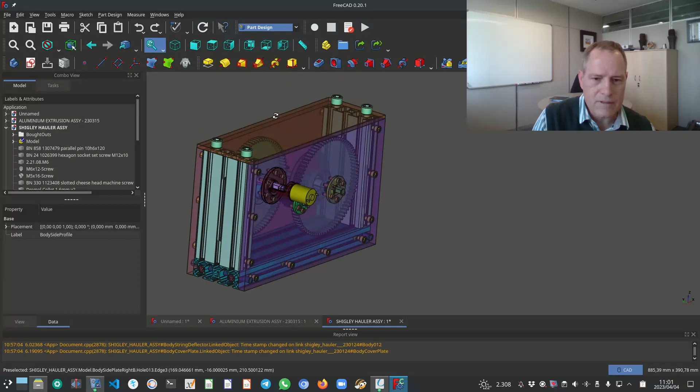So what you see on the screen is a CAD rendering, a CAD model of the Shigley Hauler gearbox. I've got separate videos explaining the gearbox, and what practicum 3 was all about was creating or dimensioning the views of the side profile. I'm hovering over one of the side profiles. There are obviously two of them, one on this side, and if I just rotate it a little bit, there's a side profile on this side, and then the base profile, which is this blue profile here at the bottom. So that was what the practicum was about.

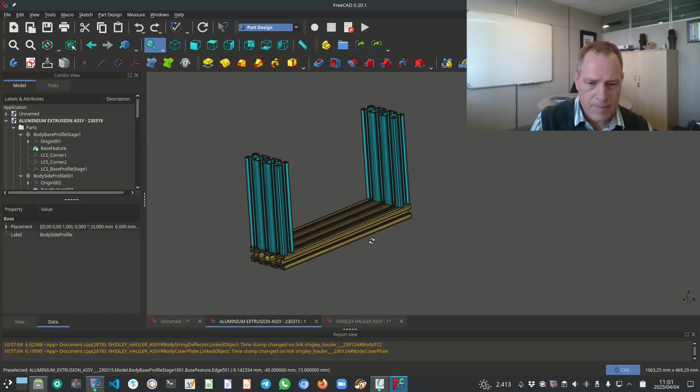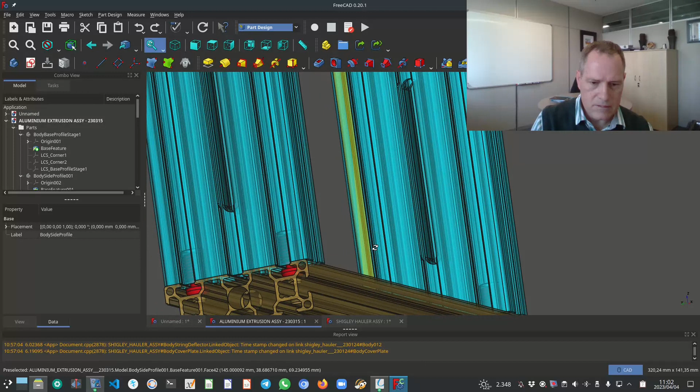In this CAD rendering, I've isolated only the two side profiles and the base profile, and what I did here is I showed how these profiles are actually connected to each other, and it's done with these screw inserts, M12 screw inserts. So for that reason, the side profile is obviously tapped in 4 places, each of them, not only the bottom but also the top, and the reason for the tapped holes in the top is because, if I can go back to this image, here you can see I've got a cover plate on top of this gearbox, and that's also secured with M4 cap screws. So that's the 4 tapped holes.

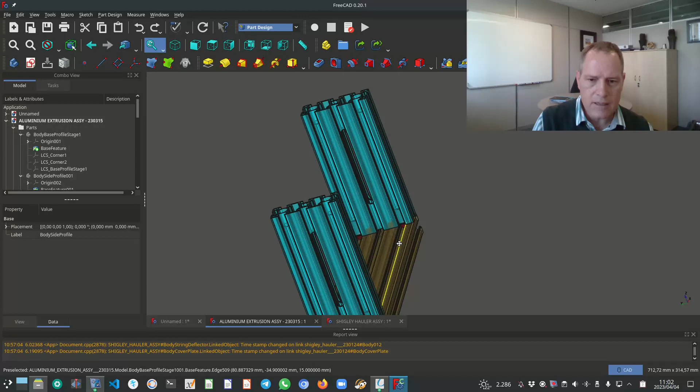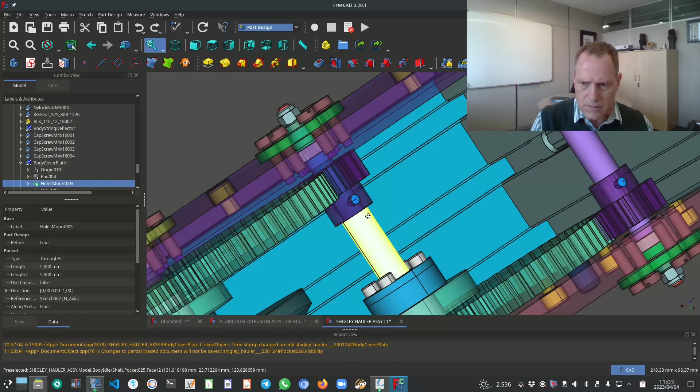Then each of the side profiles also have a slot cut into the side profile. The reason for that is this gearbox will wind a fishing line. Let me just do this quickly. Okay, so if I go to the inside of the gearbox, you will notice it's on this side, yes. So it's a compound gearbox, and in the last shaft there's a hole, so the fishing line will go through this hole, it gets tied down, and then it leads through the slot to the base of the ramp, where a trolley with Shigley textbooks are pulled up the ramp.

Okay, now there's obviously no need to cut a slot in this side profile here, but for ease of manufacturing and assembly, it does not do any harm to cut the slot in both of them. Then you don't have to worry when you assemble your Shigley Hauler gearbox which one goes on what side. There's symmetry in the design, which makes assembly a lot easier.

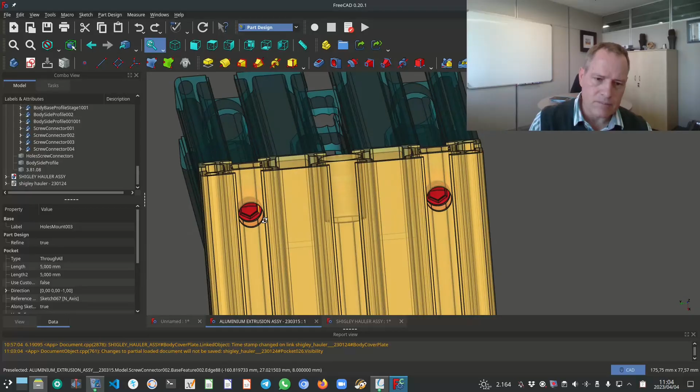Alright, so then in terms of the base profile, in order to secure these screw-in fasteners, these red screw connectors, I think that's what they are called, we need access for an Allen key in order to secure the screw inserts. Okay, so that's, I think, self-explanatory. And then also on the base profile, there are tapped holes here in the middle for a certain depth on both sides.

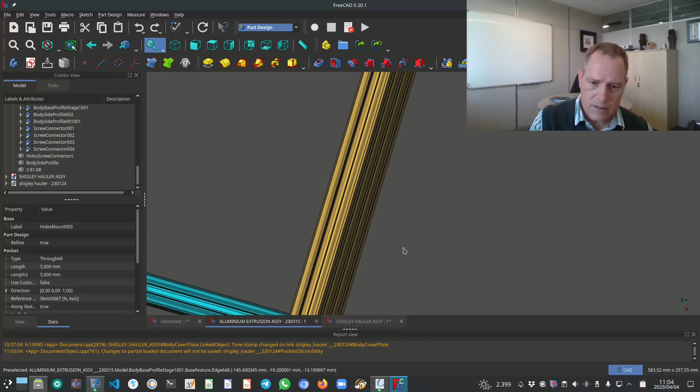Now the reason for those 2 tapped holes, if I can go back here, well, there was a design revision. The older revision of the Shigley Hauler assembly is what you see on the screen. So what I had here was tapped holes in 2 locations, and that's for set screws to secure the dowel pin that runs all the way through, and that's on both sides. The reason for the dowel pins are to get good alignment between the 2 side plates. Right, so I did mention the dowel pins, etc. also in a previous video, so you're welcome to have a look there.

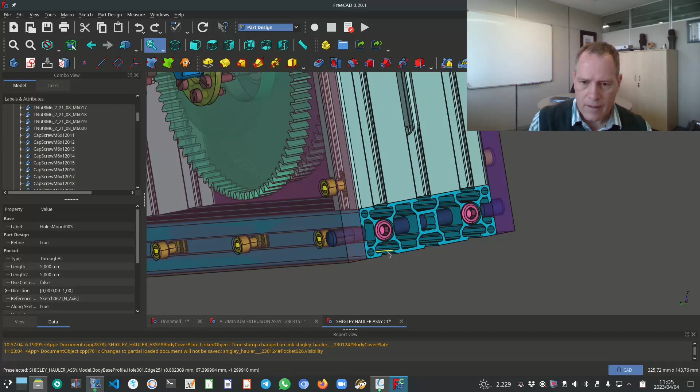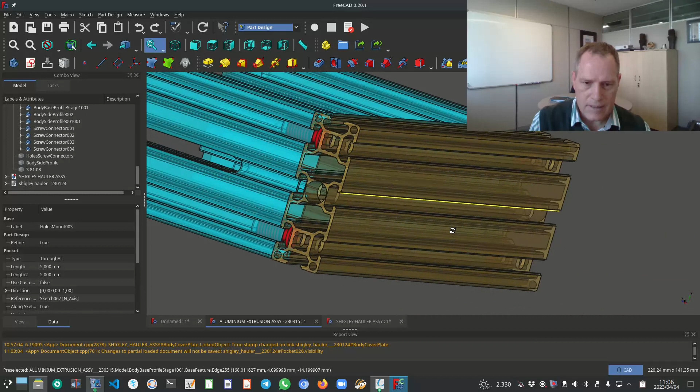So as I said, just getting back to the 2 set screws that I had here in this previous revision, I changed the design to have a single set screw in the middle to secure the dowel pin, and to then successfully have access for the 2 screw connectors. So if I can zoom in here, I've got 2 screw connectors. I need access to those screw connectors, and I need a single tapped hole in the middle to secure the dowel that runs through the base profile.

Now what you will notice, and obviously this will be a question, is where's the hole for the dowel? It's not in this initial or stage 1 base profile step file that you see on the screen.

The base profile is machined in 2 stages. Stage 1 is simply tapping that M12 thread and drilling the 4 holes, and then stage 2 will machine the dowel hole as a precision hole, but we'll get to that in a later video. So that's why what you see on the screen is simply a stage 1 base profile connected to the side profiles.

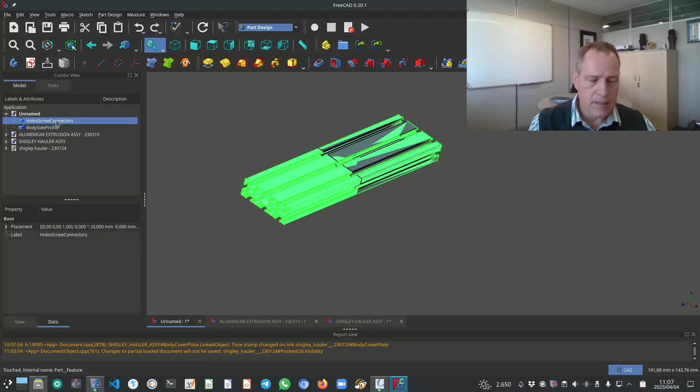All right, so with that said, what you see on the screen here is just an import of the base profile. I also imported the step file of the side profile. So if I click on the base profile and I press spacebar, it will disappear from my window here. And similarly, I can make the side profile disappear by selecting it and pressing spacebar. If I select the base profile again and press spacebar, it will appear again.

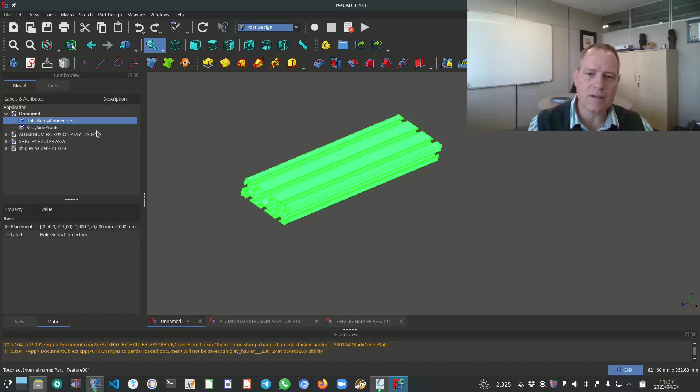And the reason why we have it open in FreeCAD is because we want to take measurements, and for that we're going to use the manipulator workbench. And I'll show later on how we go about deciding which measurements to take, because we obviously first need to decide which dimensions we're going to put on the drawing, and then measure those dimensions on the step file and put it down on the OCR form.

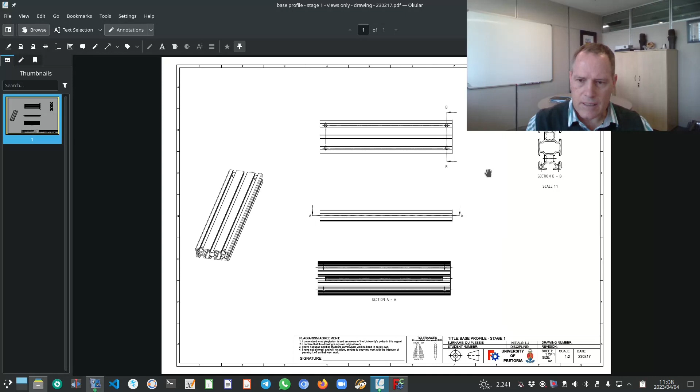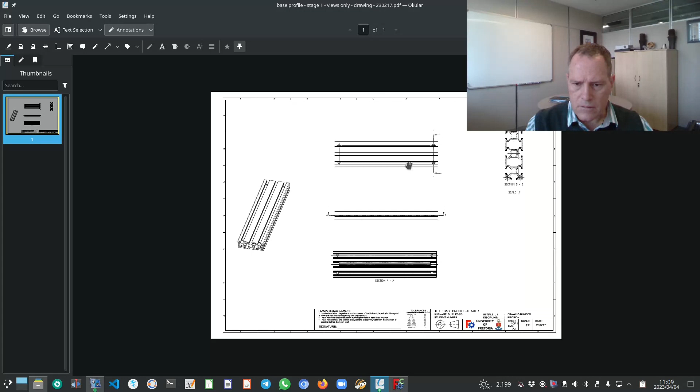Okay, so let me quickly show you. Here we go. What you see here is, if I can just zoom out a little bit. So yeah, that's not going to work. Okay, so these are the views for the base profile stage 1, and we need to now dimension each of these views. I've deliberately taken out the dimensions, just showing the views. So there's basically a front view, a side view, a section view AA, and that's the section view BB.

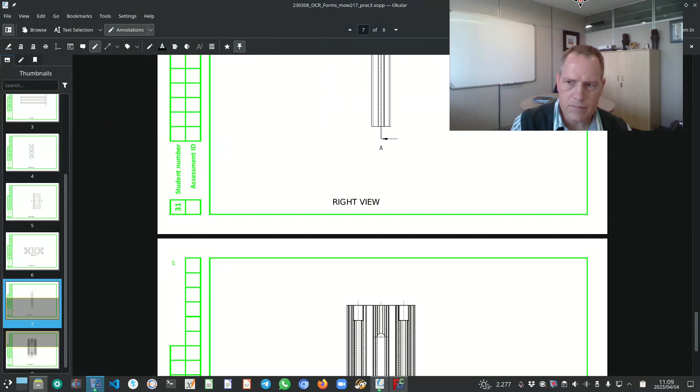So those 4 views we need to dimension for the base profile, and then for the side profile, there's a front view, section view BB, a side view, and a section view AA. So those 4 views for the side profile. Okay, and what the OCR form looks like. So let me do this again. So if we scroll to the top,

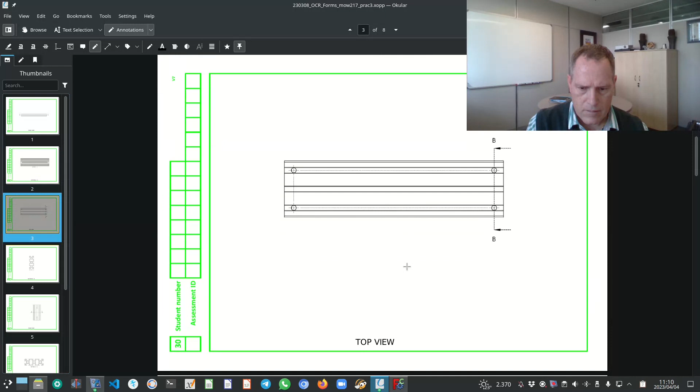yeah, so this is the base profile front view, base profile section AA, base profile top view, base profile section BB, and then side profile front view, side profile section BB, side profile right view, and lastly the side profile section AA. Right, so these are the views that we are now going to dimension.

It's important to note and understand that these profiles come as standard bought out items. You buy them. There are different suppliers in South Africa. You get them from Modular Assembly Technology, and they supply them per meter. You can define the required length you want. So in our drawings, we will not specify any of the detail dimensions. We will, however, specify the length of the cross section and the height of the cross section as reference dimensions. Reference dimensions are put on the drawing for information only, and they're put in round brackets.

But what we will definitely have to specify is the length of the profile we want plus a tolerance. So if we go to our base profile view, we can put the length on any of these views, because the total length of the profile is visible in all three views, but you will put the length only in one of the views. You won't put the length in more than one view because it's unnecessary, and it's also not drawing practice.

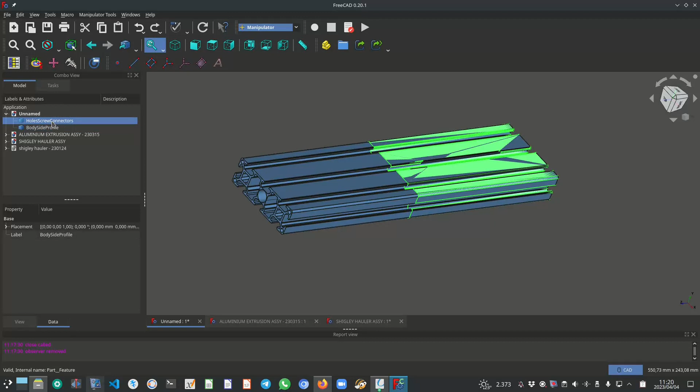In FreeCAD, if you highlight an item in the model tree and you press spacebar, it will disappear. Okay, so I've imported both the side profile, which is now visible on the screen, as well as the base profile, so I can make the side profile disappear. Select it in the model tree, press spacebar, click on the base profile, press the spacebar, and it will appear.

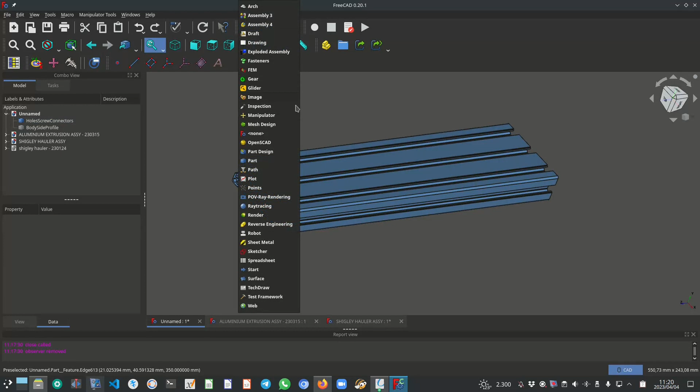Okay. Now, in order to take measurements, I prefer using the Manipulator workbench. There are other ways as well. The Manipulator workbench you need to install specifically from the Add-on Manager. So if you don't have it in FreeCAD, you go to Tools, you go to Add-on Manager. It will open all the available workbenches, and then you can search for Manipulator. There's the Manipulator workbench. Alright, so if you click on it, you can either update, which is I think necessary in my case, but I'm not going to do it now, or install it if you don't have it.

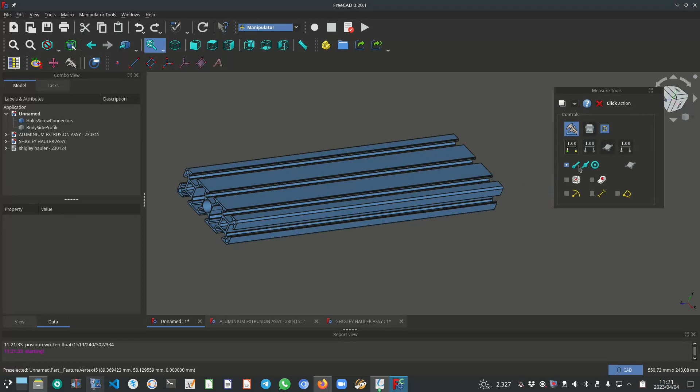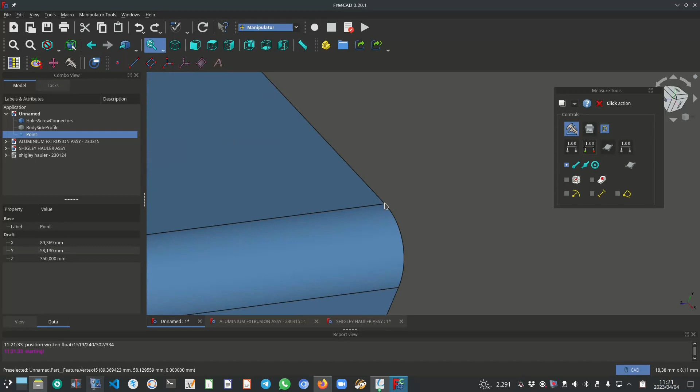Alright. So with the Manipulator workbench open, we click on the caliper, we click on the caliper again, and now we have two options. We can either use the default probe or select endpoints. Okay, so then we need to zoom in enough. Click on that endpoint, zoom out. Now you need to remember which endpoint you selected, but you can do that. Click on that endpoint, zoom out again, and there you can see that the length or the distance is 350 millimeters.

What you will notice is that the distance and distance label are now added to the model tree. So if we want to delete them, select them in the model tree and press delete. Okay, so a more elegant way of getting the length is we click on this icon over here, and then we can select any of the edges. And there you can see the length of that edge is 350, which corresponds to our previous measurement.

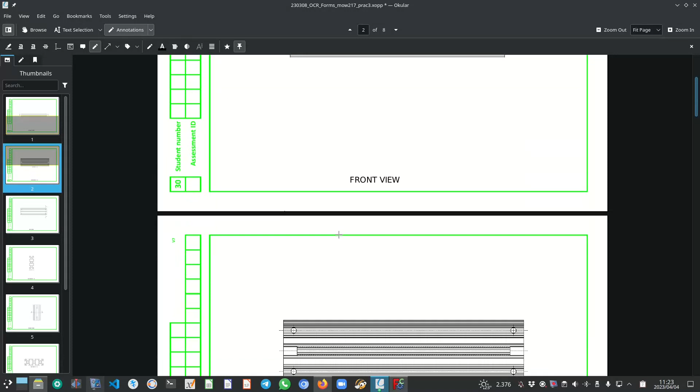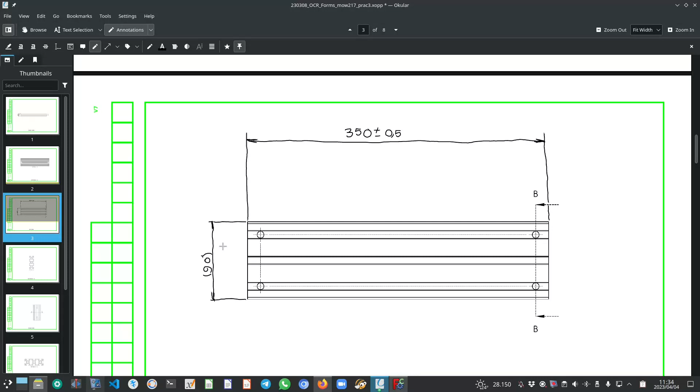All right, so with that done, let's now jump to our OCR form. We're going to add the length on this view as well as the reference dimension, and then on this view we're going to put that reference dimension. Here's the top view. Here you can see I've dimensioned the length as 350, and I've decided on a tolerance of plus minus 0.5. We'll get to the tolerance in a little bit, but you will notice that I've made these leader lines quite long. I want to specify datums and also form tolerances on these leader lines. You will also note the 90 reference dimension, as well as the 30 reference dimension that we spoke about.

Now, I just want to make you aware, if you look at this leader line, whenever there's leader lines crossing any other leader lines, or like in this case the arrow, you will break the leader line. You will not simply draw the leader line all the way through. And even though it is a freehand sketch, please write neatly.

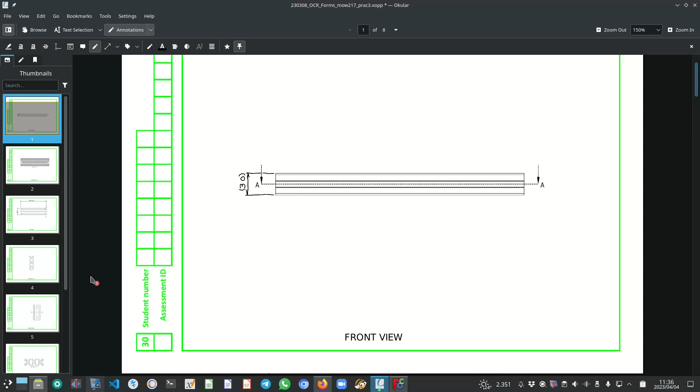The other important thing is the orientation. We will write so that the view is readable in a 12 o'clock orientation or a 9 o'clock orientation, and this is what I'm referring to here as a 9 o'clock orientation. We will not use 3 o'clock or 6 o'clock, 6 o'clock being upside down, 3 o'clock being orientated clockwise 90 degrees. So we orientate our dimensions counterclockwise 90 degrees or horizontal. The same is obviously true over here.

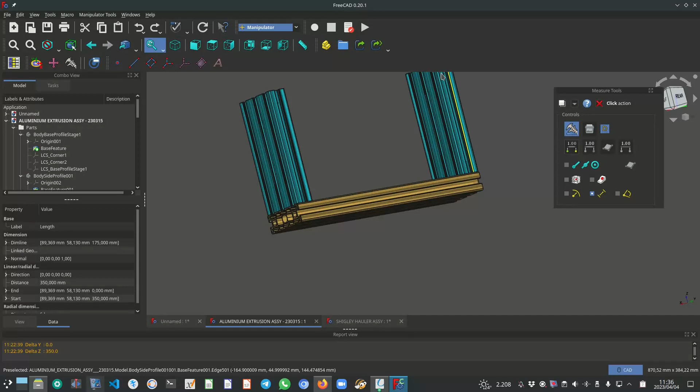Now, let's get to the plus minus 0.5. It's a very loose tolerance, and it's easily achievable with a cut-off machine. For this application, where we have a base profile and two side profiles, there's nothing making contact with this surface afterwards, so we don't have to worry about the length being very precise. Looking at the gearbox as an assembled unit, there's no need to have it very accurate.

You could go for something smaller, but I would not recommend anything smaller than plus minus 0.2, definitely not. Going bigger than 0.5 might also be problematic. Something like plus minus 1 millimeter will be visible in your assembly. So anyway, this is my selection. You are welcome to choose anything else, but not less than 0.2.

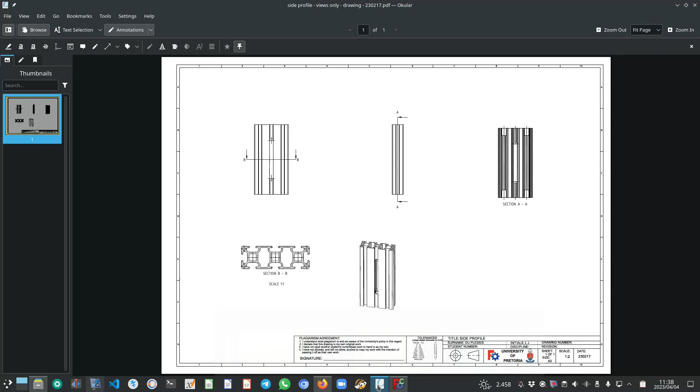Okay, so with the length of the profile specified, we could order cut aluminium profiles to that length, and the manufacturer will be able to deliver what we've ordered. Because we've got a length, he will be able to deliver that. But in this case, we have additional features that need to be drilled and tapped into this profile before it can be delivered.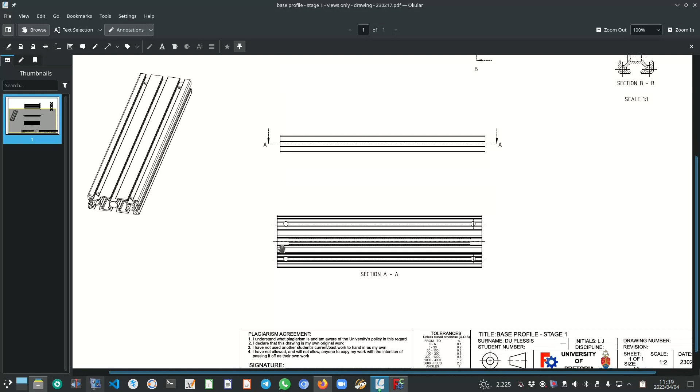So it makes sense then to dimension those features that we want machined or drilled or tapped in the profile. Now the M12 tapped holes that are visible here in section AA, those two tapped holes, let's dimension them, and then finally we'll dimension the 4 access holes, but that we'll do later on. Okay, for now we are just going to dimension the tapped holes.

If we go back to the supplier website, here you can see that the diameter of this profile's center hole, actually all 3 holes, that diameter is 10 and it is suitable to be tapped M12. That's why the supplier put this M12 here in brackets. It's suitable to be tapped. Okay, so all we need to do really in order to specify the tapped hole is the depth of the tapped hole. And there's only one obvious choice to dimension that depth, and this is on this section AA view. That's where we will dimension the depth.

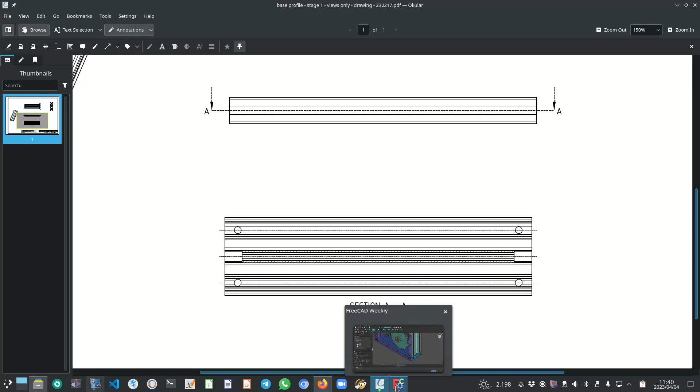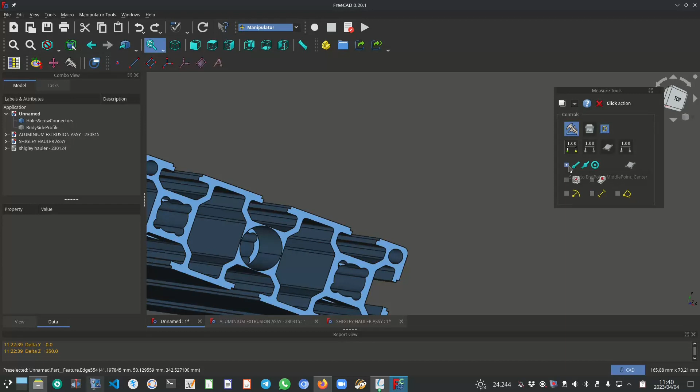Alright, so now what we will have to do is measure that depth. Okay, so let's just delete these measurements that we took. If I zoom in, I can rotate. So what I can do with the manipulator workbench, let's select the probe. Let's select this circle then. And we zoom in and we select that circle. Okay, and here you can see the length between the center points of those 2 circles is 20 millimeters. So that's the depth of the hole.

Now what we'll do is we'll go to our drawing. Where was it? I think it was here. Yeah. So on this view, we will simply dimension and show that this is an M12 tapped hole, and we'll show the depth with a tolerance. All right. So what I've done here now is I've indicated the depth. Well, firstly, let's just talk about specifying the thread. So I write the words tap M12 by 1,75. That 1,75 is the pitch of a coarse M12 thread, and I put the words in 2 places, because it will be unnecessary to dimension this tapped hole on both ends of this section AA.

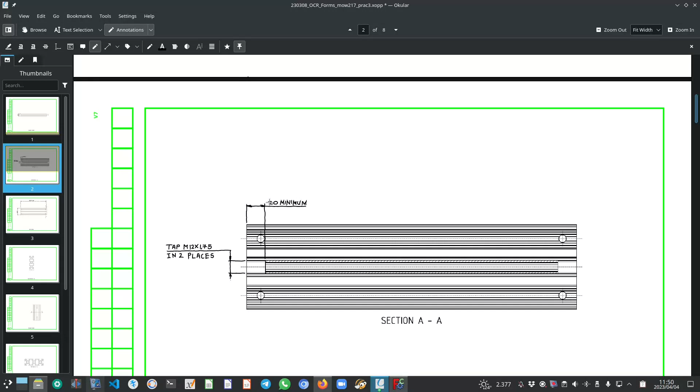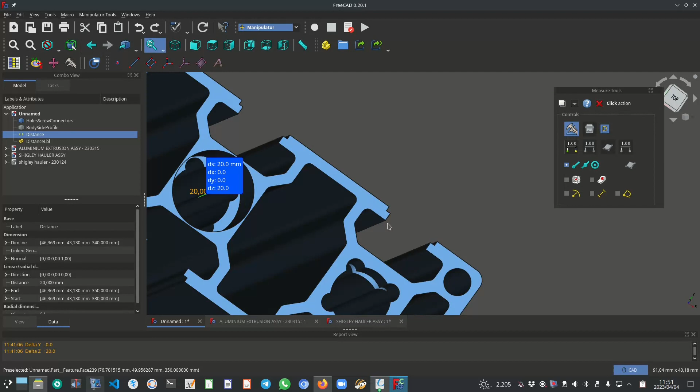Then secondly, what I also did was I indicated the depth. And instead of putting a tolerance, which would also be correct, I simply say minimum 20 millimeters deep. I put the word minimum. So if the manufacturer taps a little bit deeper, it's not a problem for us. If you look at this assembly, it will definitely not do any damage if that tapped hole is deeper than 20 millimeters, but it shouldn't be less than 20 millimeters.

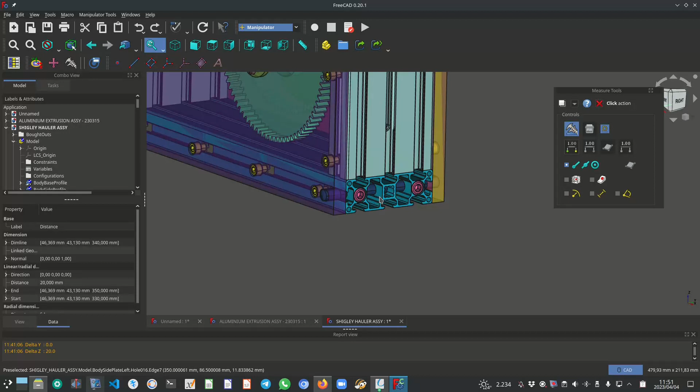We don't want it too shallow or too short, because then the functioning, okay, and just remember again, this is revision 0 you're looking at, or revision 1. The revision 2 design is the one with a single tapped hole. So it's important that the thread actually reaches the dowel pin, so that when we tighten these set screws, and in revision 2 it will be a single set screw, we want to clamp the dowel to prevent it from falling out. Okay, so that's then done.

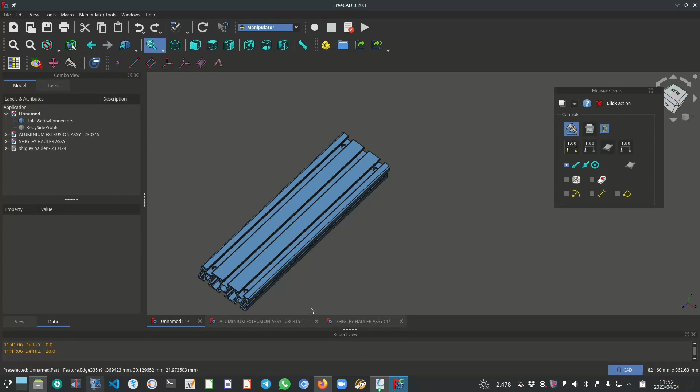So the last features that we need to specify for the base profile are these 4 clearance holes. We need to now specify them. Let's just select these lengths and delete them. Right. There are different strategies that you can follow to dimension those holes. The strategy that I prefer and that I recommend you use is using a datum reference frame with basic dimensions and a positional tolerance. So in order to do that, we need to decide on our drawing where we're going to define the datums.

And what I want to do is specify this bottom surface. Remember we're looking at a line if we look at the top view, but that line represents a surface, the surface which looks as is shown in the front view. So in the top view, I'm going to specify this surface as a datum, and this surface over here, this end here, I'm going to specify those two as datums. Now in order to do that, you will remember our length tolerance was very loose. It was plus minus 0.5. So I want to constrain the form deviation, the perpendicularity of these two faces.

I'm not so worried about the length. It can vary with plus minus 0.5, but I want the faces to be perpendicular to the rest of the aluminium profile. Right, so I've got two datums, and the third datum for this base profile stage 1, you can select either the top or bottom face. It's okay.

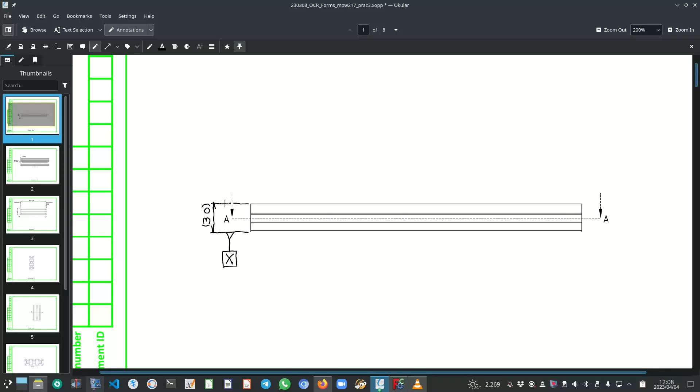Note that the leader line of the datum box is not in line with the dimension. You could have done it like that. The implication is then your datum is the symmetry plane lying between the top and bottom surfaces. The way I've done it here, I indicate the bottom surface. I could also have placed the datum box with its leader line touching this bottom line, and the same is true if I selected the top surface. I could have put the datum box with its leader line on this leader line or on this line over here. So that's datum X.

Let's have a look at the other two datums. So I've selected this bottom surface as datum Y. Now you can indicate the triangle either as a filled triangle or as an empty triangle. It's easier on my scratch pad to indicate it as an open triangle. And note also, ladies and gentlemen, the leader line of the datum box is separated from the dimension line because I want to indicate the bottom surface. If I put it in line with the dimension line, I will be referencing the symmetry plane, which is not what I want to do in this case. And the same goes for what I've done here. So let's just have a quick look.

So I'm saying this surface needs to be perpendicular to within 0,2 relative to datums X and Y. The reason for that is, as I said earlier, I have a loose tolerance in terms of length, but I don't want the perpendicularity to be 0.5 millimeter out. I want to constrain the perpendicularity of this face to 0,2. Now, important, there are two datums applicable here. In other words, this face needs to be perpendicular to both faces, datum X and datum face Y. The same goes for the opposite side. I specified it as perpendicular 0,2 relative to X and Y.

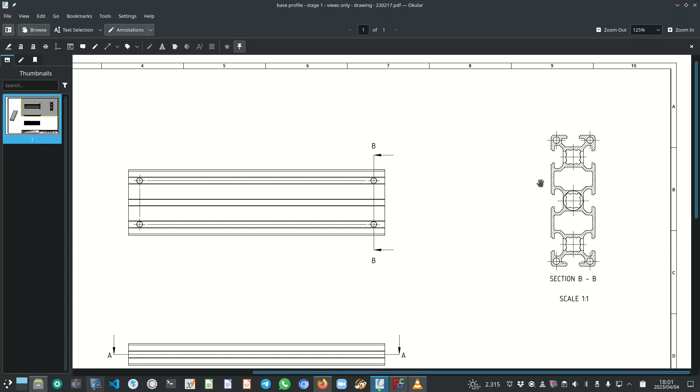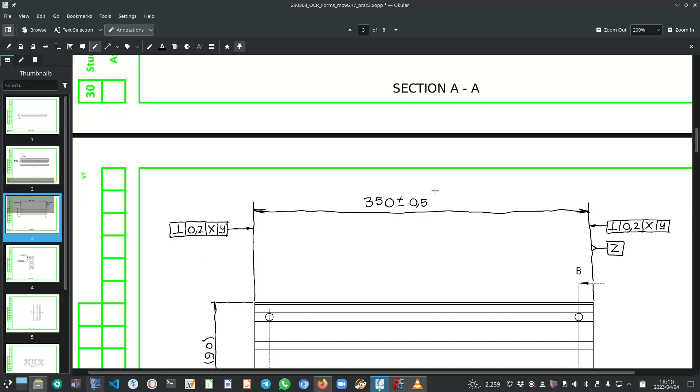So the first thing that we will do is we will measure the diameter of these holes. In order to do that, we go to FreeCAD, we use the manipulator workbench, and we click on get radius of an arc or circle. We zoom in, we click on the arc, and there you can see the radius is 4, implying that the diameter is 8. So with that done, we can then dimension the diameter of the hole on section BB.

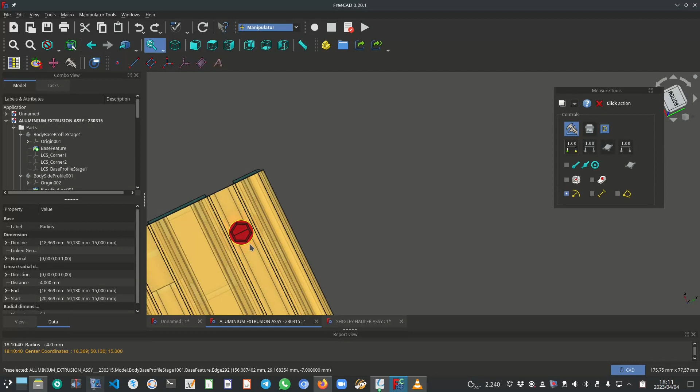We've got 4 holes, so that's why there is a 4 times diameter 8 plus minus 0,5. So I've selected a very loose tolerance. This is just a clearance hole, as I've said before, for the screw fasteners. There's an Allen key that will go in there and locate with this hexagon in order to tighten or loosen the screw fastener.

Okay, so for that reason we don't need any sort of tight tolerance. So this plus minus 0,5 is adequate. You can go smaller, but not tighter, that I would recommend, than plus minus 0,2, and plus minus 0,5 is also, I think, at the higher end, or at the maximum scale of tolerancing.

Right, then in line, this is very important, in line with the dimension line, we've got a leader line, and here we specify a positional tolerance, diameter 0,4, once again quite loose. You could go a little bit tighter, but I wouldn't recommend anything tighter than diameter 0,2 again, and it's relative to datum X, Y, Z, X being the primary datum, Y secondary, and Z the tertiary datum.

Okay, so with that done, we still need to do one more thing, and that is to indicate the basic or theoretical exact dimensions from datum Y and datum Z. It's very important that we do so starting from datum Y and starting from datum Z, because these are the datums that we have selected. If we selected, for example, the top surface, then we would show the basic dimensions from that face. But this was our choice, so we need to stick to our choice when we put in the basic or theoretical exact dimensions.

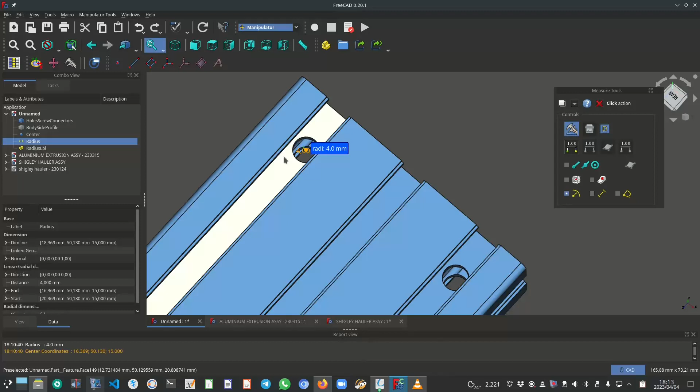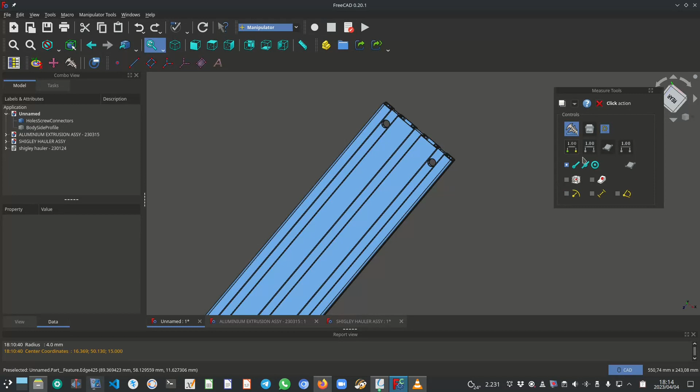Now, before I do that, let's just jump back to our FreeCAD manipulator workbench. We can select and delete that dimension. Right, what we now want to do is find the location of that center point. So in order to do that, let's select the probe. Okay, so we say the center point, and let's go to this face. Okay, so now we must be careful.

We have got the length, which is now from the center of the face to the center of that hole. That's ds. The x is 30 millimeters. That's the distance in the x direction. Y is 7. And z is 15 if you round that off to machine precision. 15, and z is the coordinate that we are interested in.

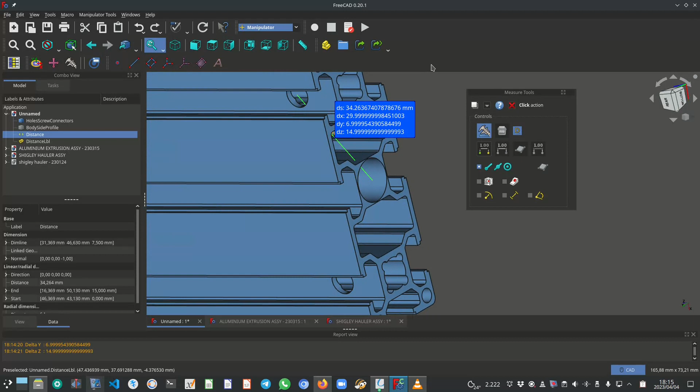Okay, so if I can show you here, yes, if you look at this, let's do this. Here we go. So how do I know that the z is the value that we want? Z is the blue axis. Z is blue, x is red, and y is green. So y is perpendicular to the surface, x is obviously to the right, and z is in this direction. So our z component is 15 millimeters. In other words, the distance from that face to the center of that hole is 15.

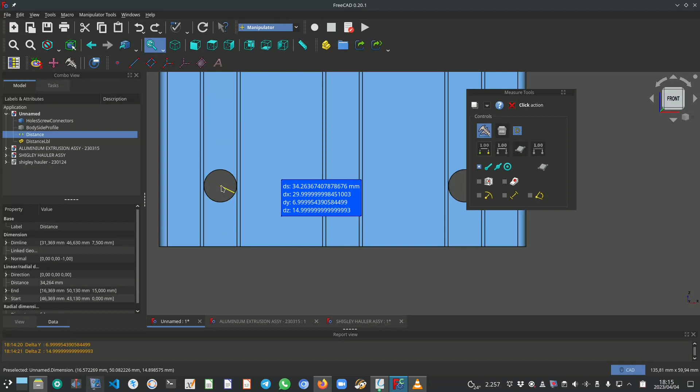Okay, we can do the same, selecting that circle and that circle. So that distance is 320 millimeters. Okay, so what you see on the screen now is the 15 millimeter basic or theoretical exact dimension from datum Z to these two holes, and then the 320 between the two holes, or two sets of holes.

What is also important is that there should be a dash dot line, or in this case now the section dash line, connecting the two holes, so we can clearly see that those two holes are at the same location. So the 15 indicates the location of both holes, and then I've got this dash dot line connecting these two holes, as well as these two holes over here. So we can clearly see our dimensions relate to two holes. That's true for the 320, and also for the 15 millimeters.

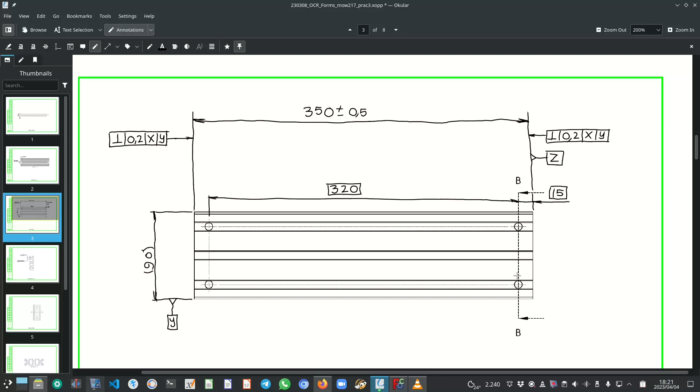Right, so what we now want to do is go back to FreeCAD and measure the vertical distance from datum Y to these two holes, and then the vertical distance between these two holes, which is exactly the same as the vertical distance between these two holes. So let's go to FreeCAD. We can select these distances that we've measured. Then with our probe selected, we select the circle and we select this face.

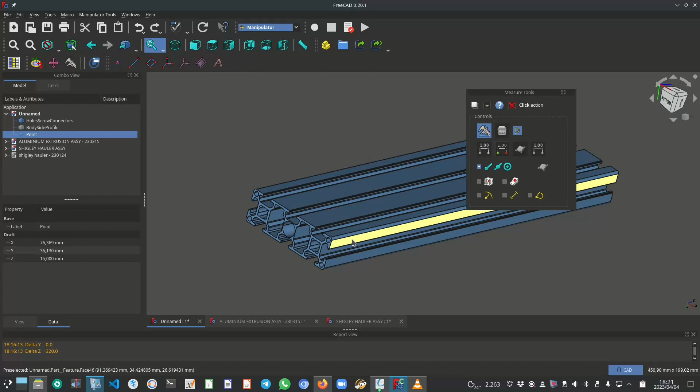Okay, and now I can already see it's the x-axis. The x-coordinate is the one that we're looking for, which is also 15 millimeters. X is the red axis, and that's the direction that we are interested in. All right, and then if we click that hole and this hole, X once again is 60, which is the same as the total distance, which is also 60, because those two are in line with each other in the X direction. So it's 15 from the edge and 60 between the two holes.

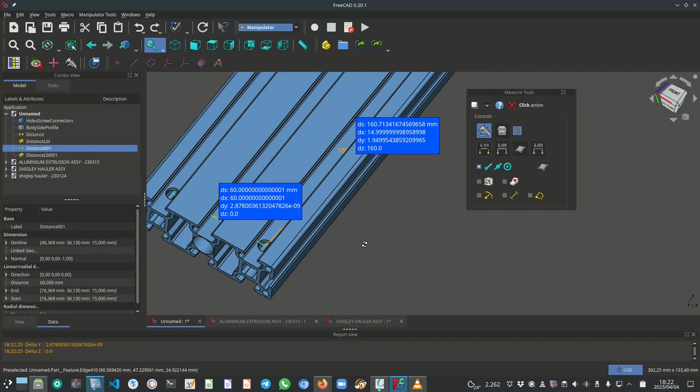Okay, and if you were wondering, this is obviously symmetric, so you can check that by asking, what's the distance between that hole and this face?

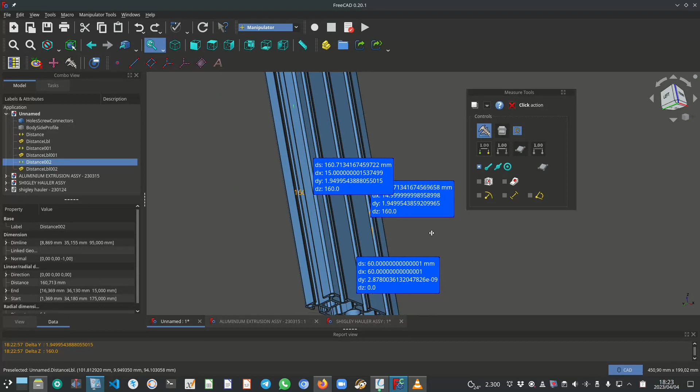Okay, let's just see. There we go. X once again 15 millimeters. All right, so those two holes are symmetric, if you didn't notice that already. Okay, so now I've indicated the 15 millimeter theoretical exact dimension from datum Y to these two holes, as well as the 60 millimeters.

Now what I also just want to point out is how I make my arrowheads. It's not that easy on my scratch or pencil pad, but basically what you want to do is make the line end a little bit thicker. It's not a very prominent arrow. It should be delicate.

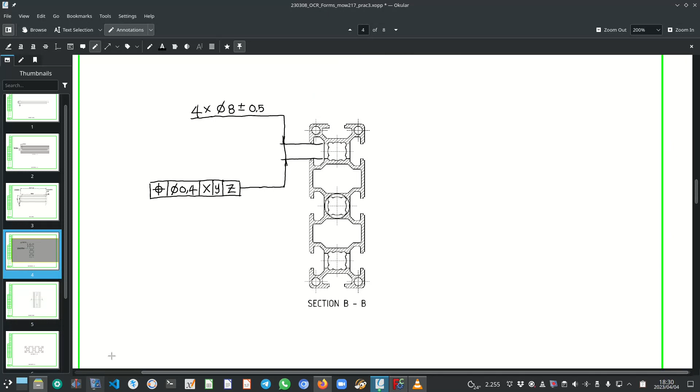And with that, this base profile stage 1 drawing is completely dimensioned. Okay, we've got all of the dimensions necessary to manufacture this component. The one thing that I do want to just point out is what are the notes that we would add onto the drawing.

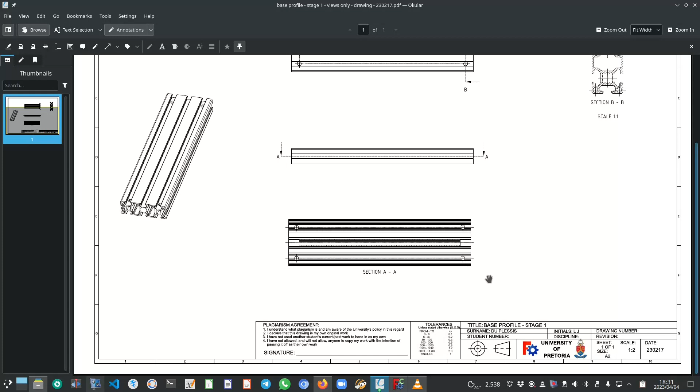So I'll show you the memorandum drawing. In this area over here, we will add notes specifying the material, the surface texture, the fact that sharp edges need to be removed, and unspecified fillet radii, as well as number 5, the surface finish. If we were to paint or coat this component, we would specify it in notes.

All right. So on this PDF, you can actually see the complete drawing with all the dimensions on the views of the drawing, and this is what I referred to earlier. The notes: the material is aluminium profile, PG30, 30 by 90, 8 slots. That comes from this description over here, from the supplier's description, and the others are very simply surface texture, RA 3,2 unless otherwise specified.

So in other words, these faces that will get cut and the holes that will be drilled need to have a surface texture of 3,2 micron RA. We need to break all unspecified sharp edges to 0,3 max by 45 degrees plus minus 5 degrees, and all unspecified fillet radii to be R 0,4 max.

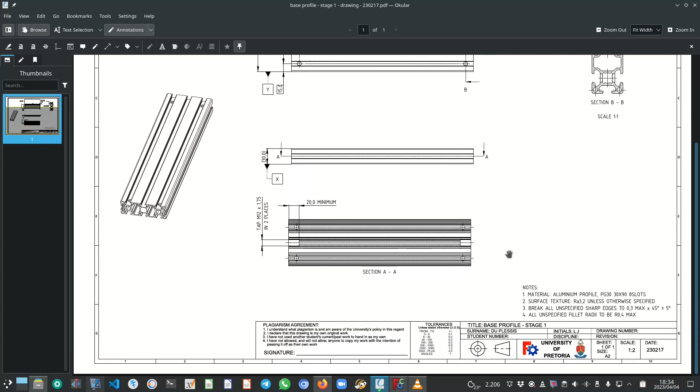Okay, you could add, as I said, surface finish, and in this case there's no specific surface finish that we want, so you could say surface finish none, for completeness' sake. Yes, so with that said, that's the detail mechanical drawing for base profile stage 1. So next what we will do is dimension the side profile.

To get the length of the side profile, we use once again the manipulator workbench in FreeCAD, and we can click this icon over here to get a length, and then select one of the edges, and there you can see it's 184 millimeters. So I've already added the 184 on the front view, and as you can see, I selected once again a tolerance of plus minus 0.5 millimeter.

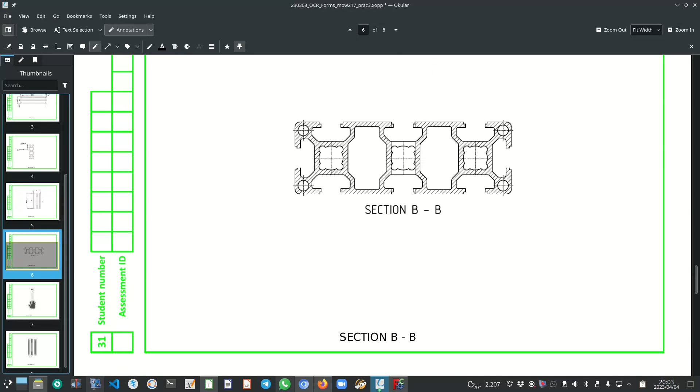You can go smaller, but not smaller than plus minus 0.2. Also, I don't think it's wise to go much larger than plus minus 0.5. So this is the maximum that I'm comfortable specifying. You will also notice the 90mm reference dimension on the front view, and if I scroll down to the right view, you will notice the 30mm reference dimension.

So that was our first step, to give the overall dimensions of our part: the length, the width, and the thickness. The next set of features that we will dimension is the set of tapped holes that is visible on section AA. The 4 tapped holes that you can see over here.

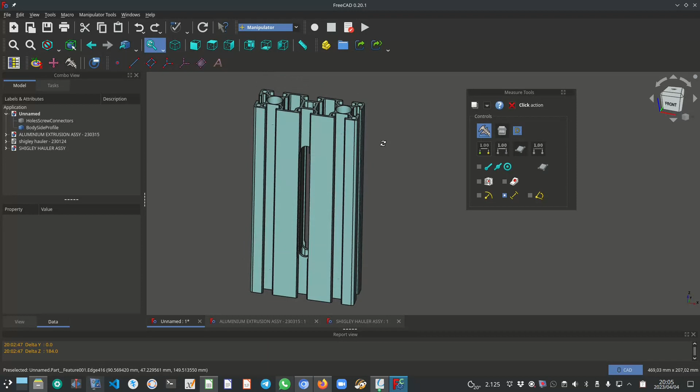Now to do that, let's go back to FreeCAD. Let us once again delete that dimension, and if we orient it correctly, we can, as a matter of fact, select that, and it's 20 millimeters.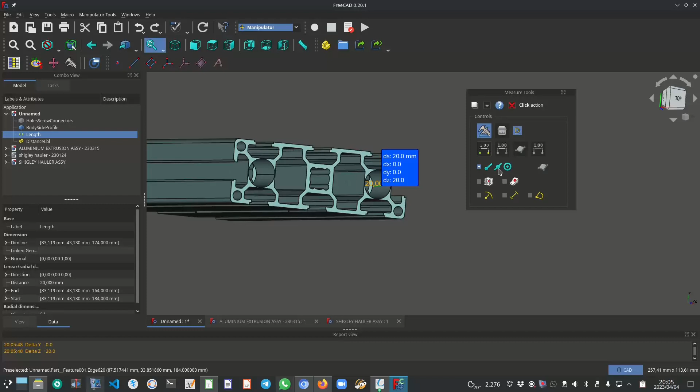So we've got the length. I selected this edge over here. Alternatively, what you could have done is click to activate the probe, and then select that circle and this circle over here, and there you can see for both it gives the length of, or the depth of, the tapped hole as 20 millimeters.

So I've indicated the tap dimension. I've written the word tap M12 by 1,75 in 4 places. I didn't mention it before, but the reason why I specifically write the word tap is because for the profile, there's no additional machining or hole to be drilled. It's simply a matter of threading the M12 thread into this already 10 millimeter diameter hole.

So that's indicated, as well as the pitch of the coarse thread. That's standard. If you Google M12 thread coarse pitch, you'll get 1,75 millimeters. And then I write the words in 4 places, and that's because all 4 of these tapped holes are identical. And then the depth, as with the base profile, I'm not specifying a tolerance. I'm just saying 20 minimum.

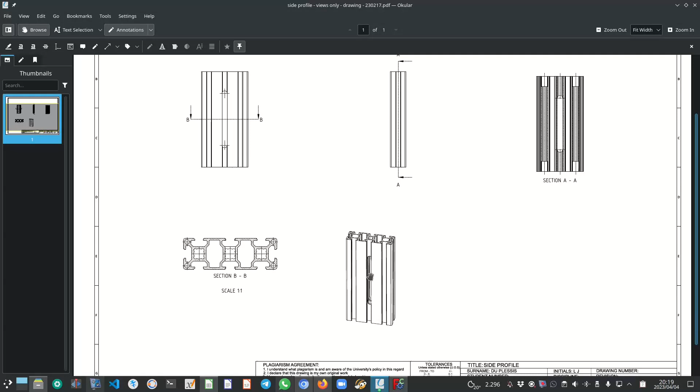So with the 4 tapped holes specified, the only remaining feature that we need to dimension is the slot in the middle. Now I'm showing the slot in the front view, and also in section BB. I clearly indicate that the slot goes all the way through the profile. And you can also see in this isometric view there's a slot that goes all the way through. So we will dimension the length of the slot on the front view. We will dimension the width of the slot in section BB.

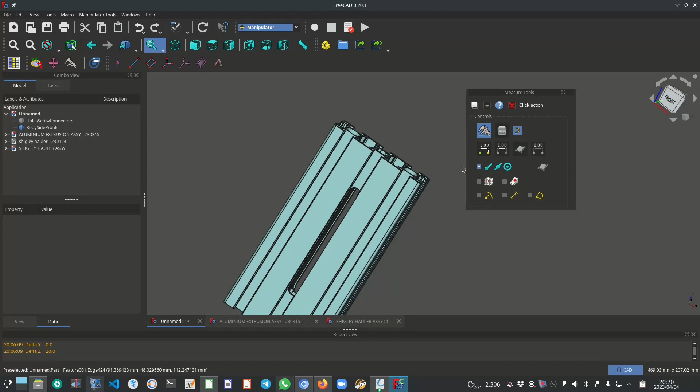Now, before we jump in with the dimensions, we need to take a few measurements. So in FreeCAD, with the manipulator workbench, let's select the probe, zoom in, we'll select that circle over there, and this circle over here. So the length of the slot is 100 millimeters. Now, what is the location of the slot? You can clearly see the slot is symmetrical.

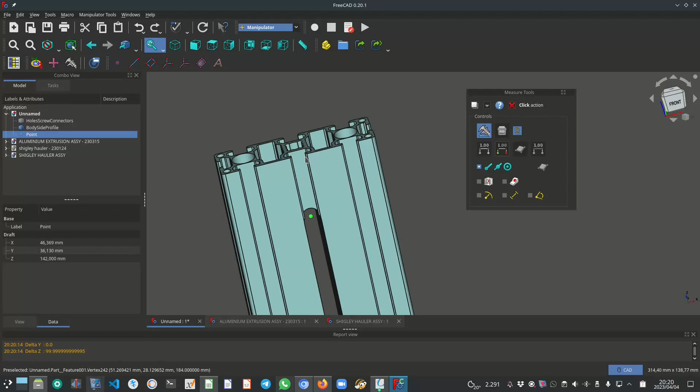Okay, let me just delete that. This bottom length and the top length are equal. So let's quickly measure. If we click on the circle and we click on this face over here, okay, I missed, that was the wrong selection, so let's try again. We click on the edge. You can notice the midpoint that's created. Make sure you select the face. Okay, and there we go. It's 42 millimeters in the Z direction. Z being the blue axis, that's what we are interested in, 42 millimeters.

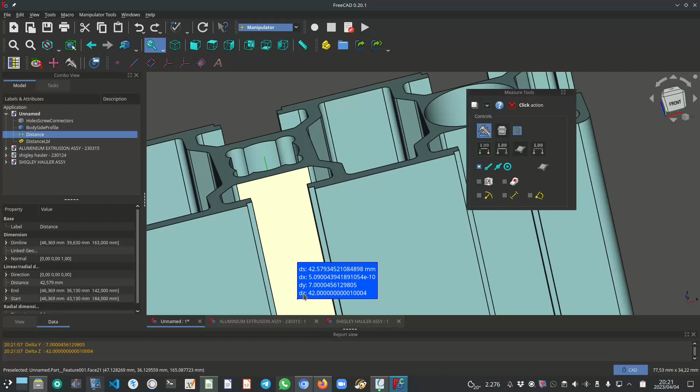And just for reference purposes, let's quickly have a look. If we select that circle, we rotate and we select this face, once again Z 42 millimeters. So you can now see the dimension and tolerance that I've put from the bottom face to the midpoint of this arc, and then between the midpoints of the two arcs that define the slot, we also have that length. This is the correct way of dimensioning the length of a slot. You don't dimension to the edge of the arc, you rather dimension to the midpoint of the arc and between the two midpoints of the arc.

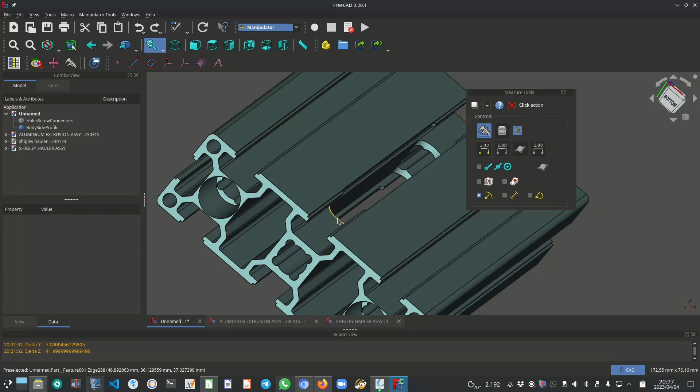Now note the tolerance is quite loose, and that corresponds to the need for this slot. There's definitely not a need to make it any more accurate than plus minus 1 millimeter, and 1 millimeter is a very relaxed tolerance. Alright, so our next step is to dimension the width of the slot, and in order to do that, we can simply measure the radius of this arc here at the end, and that radius is 5 millimeter. So the width of the slot is 10 millimeters.

I've indicated now the width of the slot as 10 millimeter plus minus 0.2, a reasonably loose tolerance. I don't want to make the tolerance too large, because then we will cut into this portion over here, which I don't necessarily want to do. So 0.2 is a loose tolerance. It's easy to achieve, no problem there.

Now going back to this front view, seeing that the slot width has a dimension of 10 and a tolerance of plus minus 0.2, we will not tolerance the two arcs at the bottom and at the top with a specific size.

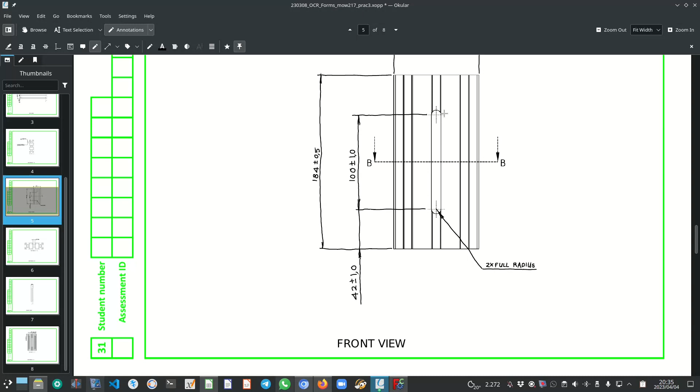All we will do is we will say 2 times full radius. So what that means and implies is, dependent on what the actual width of the slot is, be it anything between 9,8 and 10,2 millimeter, the radius must follow the width of the slot. So that takes care of the width and the length of the slot.

And this dimension also takes care of the location or position of the slot in a vertical direction. But what about the location or position of the slot in a horizontal direction? Now, in order to do that, there's an elegant solution that I want to suggest, and that is to define the symmetry plane of this 90 millimeter length as a datum, and then on this view we constrain the symmetry plane of the slot to be symmetric relative to our datum that we just discussed.

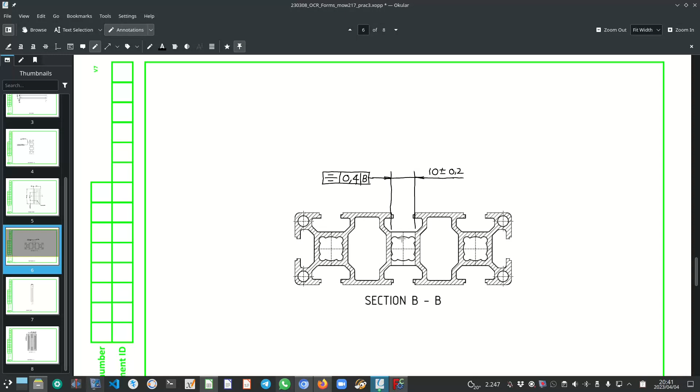What we've done here, the fact that the leader line of the datum box is in line with the 90 millimeter dimension implies that the symmetry plane of the view we are looking at is indeed our datum B. Going down then to the section view BB, we can see that I once again, in line with the dimension line, added a tolerance block with a symmetry symbol 0,4 relative to B. So we are constraining the symmetry plane of the slot to be symmetrical to the symmetry plane of the side profile to within 0,4 millimeters.

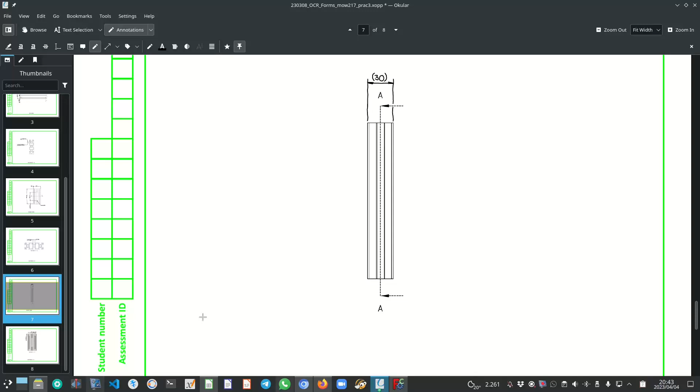The last thing that I want to add is I want to constrain the form of these two faces that will be cut from the standard or from a length of profile. So in order to do that, we need to define another datum. And what we'll do is, on the right view, we will define either one of these two surfaces as datum A. And then once that is done, we will come back to this view and constrain those two faces to be perpendicular to both datums A and datum B.

Okay, so on the right view, I've defined this face as datum A. You can, and this is what this view illustrates, connect the datum leader line to the face itself or to the extension line of a dimension, but definitely not in line with the dimension line, because we don't want to specify the symmetry plane as datum A. We want to specify this face as datum A. We could have also specified the opposite face. The same rules would have applied.

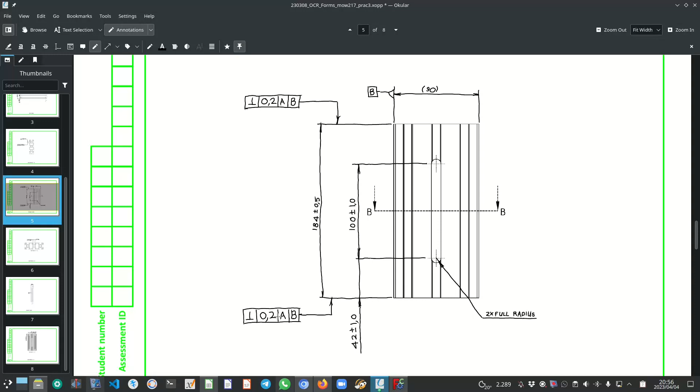Alright, so then going back to the front view, and very similar to the base profile stage 1, separated from the dimension line, we've got a leader line with a tolerance block perpendicular 0,2 relative to A and B, and the same for this bottom surface. With that, all the features of the side profile have been dimensioned.

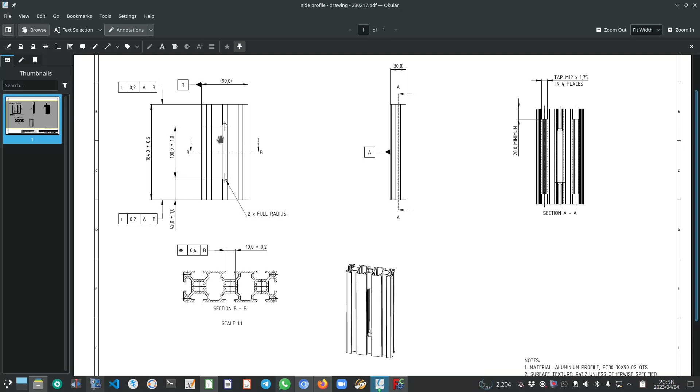This PDF shows the dimensions indicated on the detail mechanical drawing, and as before we have exactly the same notes as for base profile stage 1. The material is an aluminium profile PG30 30 by 90 8 slots. Our surface texture is RA 3,2 unless otherwise specified. So what that means is when the supplier or manufacturer cuts the length of the side profile, that surface texture and the top surface texture need to be RA 3,2, and the same goes for the machining of the slot.

Then very important, the unspecified sharp edges to be broken to a 0,3 max by 45 plus minus 5. This is specifically important for the slot because as I've mentioned at the beginning of the video, there's a fishing line that runs through the slot, and if you have sharp edges and the fishing line would make contact with any of those edges, you can get the scenario where the fishing line gets cut. Then lastly, all unspecified fillet radii to be R0,4 max. That's a standard note that I always put on a drawing.

The one that I don't show here that you can also add is surface finish. If, for example, you wanted to paint or coat the side profile with a special paint or coating, then you would have said surface finish, whatever the paint is, or surface coating. But in this case, if you do add note number 5 here at the bottom, you would simply say surface finish none. So with that, the detail mechanical drawings of both the base profile stage 1 and the side profile are completed.